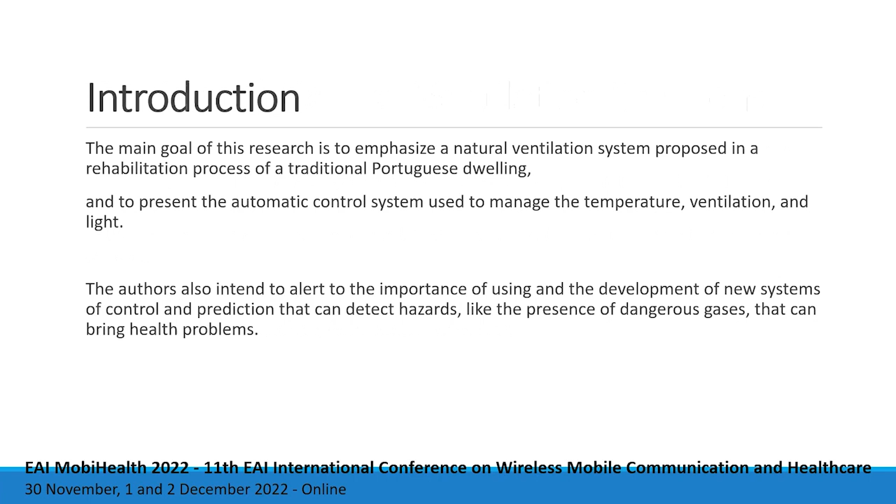In terms of ventilation, it can be natural or forced. Natural can be considered more sustainable. In contrast, a forced ventilation system may be more high-tech, requiring mechanical devices and energy consumption. But forced ventilation may be the only solution considering the specificities of the traditional buildings. For instance, the existence of underground floors, the lack of windows or doors, the density of the construction, the morphology of the landscape, and the insulation can contribute to the requirements of a ventilation system.

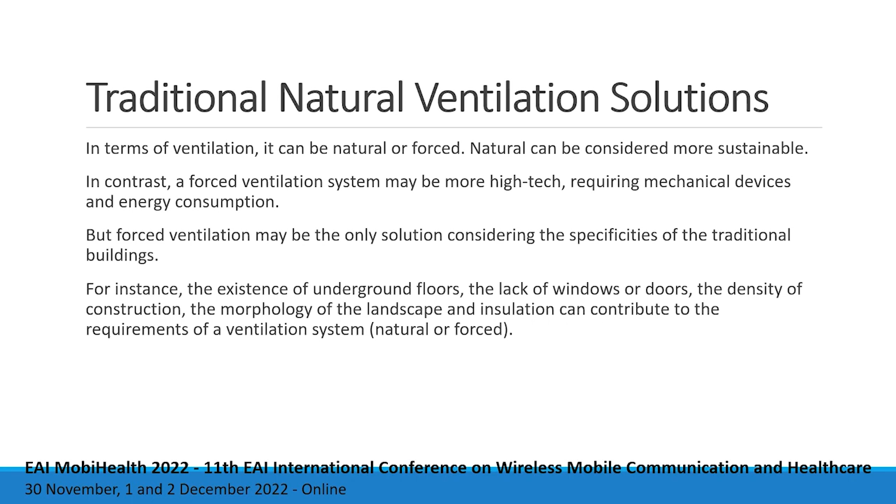A proper ventilation system allows good air quality in a building and contributes to the accommodation comfort. It avoids inconvenient smells and health-related problems such as allergies and breathing difficulties. At the same time, a proper ventilation system may avoid incidental scenarios, such as the high carbon monoxide levels that can cause death. Systems like control and prediction are needed to detect other hazards like radon or gases that can be dangerous to health. The comfort level of the accommodation is also a concern, and having some control over temperature, humidity, smell, and noise can also help.

Among traditional Portuguese dwellings, several building technical aspects guarantee natural ventilation. For instance, conventional timber frame windows and doors usually have poor insulation. The typical kitchen chimneys allow air circulation from inner and exterior spaces. Fireplaces may achieve the same feature. Meanwhile, the typical timber pavements and roofs are poorly isolated, allowing natural ventilation through different rooms. Thus, traditional dwelling may guarantee natural ventilation, even if inefficient.

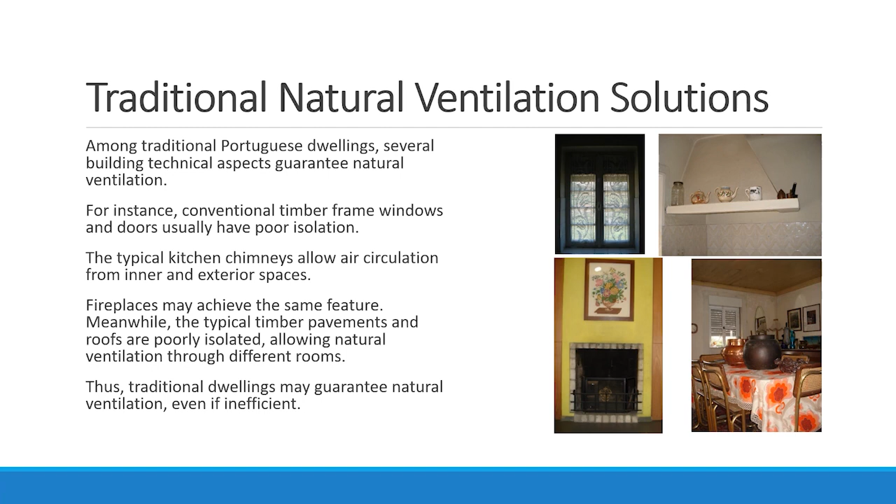On the other hand, new construction may behave differently, considering that they are much more isolated. Pavements tend to be reinforced and made of concrete. Windows and doors are sealed, and walls and roofs are insulated. Therefore, there is a need to build a proper ventilation system using pipe networks and grills. Level differentiation of entrance and exit of air is recommended. Bathrooms, closets, and storerooms may require this type of system because they tend to be unprovided of windows. When this type of natural ventilation is insufficient, it may be reinforced by forced ventilation, which relies on a mechanic extractor.

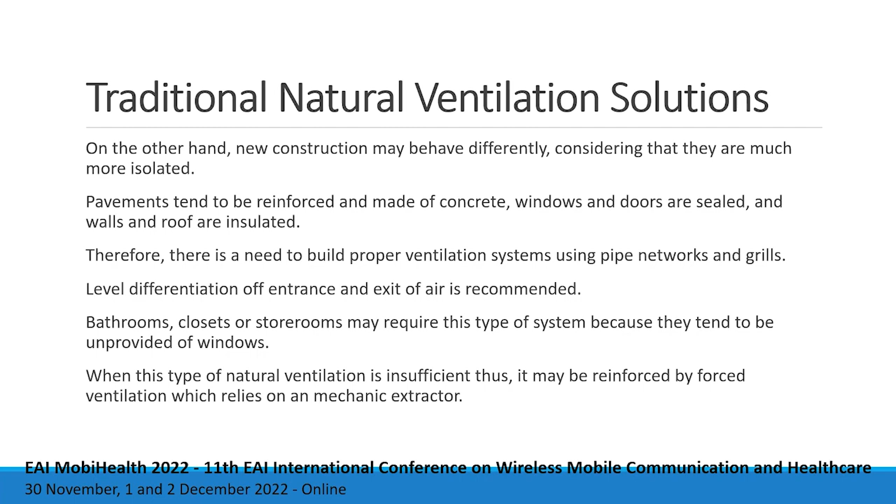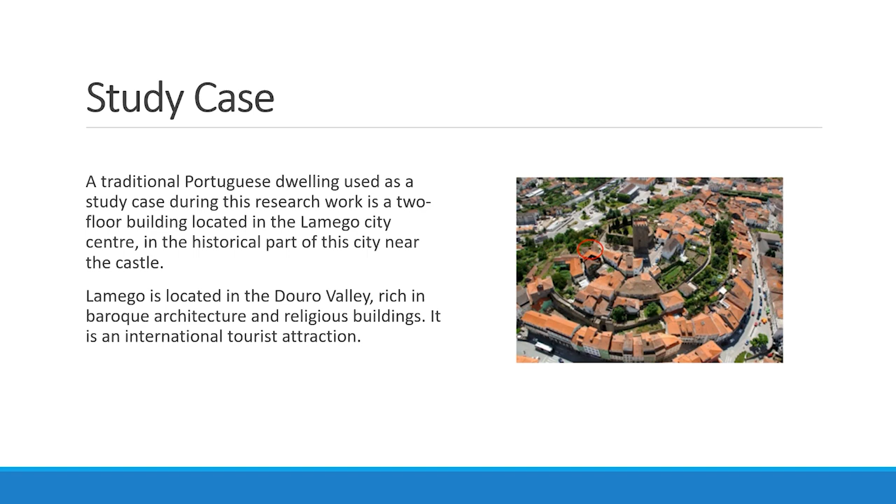For the study case, a traditional Portuguese dwelling was used. The dwelling is a two-floor building located in Lamego city center, in the historical part of this city near the castle. Lamego is located in the Douro Valley, rich in Baroque architecture and religious buildings. It is an international tourism attraction.

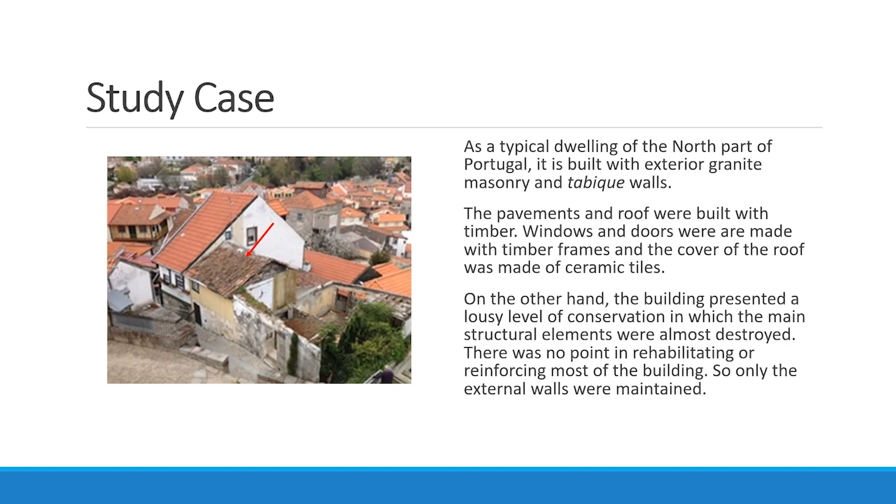As a typical dwelling of the north part of Portugal, it is built with exterior granite masonry and tabique walls. The pavements and roof were built with timber. Windows and doors were made with timber frames, and the cover of the roof was made of ceramic tiles. On the other hand, the building presented a lousy level of conservation, in which the main structural elements were almost destroyed. There was no point in rehabilitating or reinforcing most of the building, so only the external walls were maintained. Municipality regulations only allow the use of timber or steel as structural building materials for this type of rehabilitation process in this area. Therefore, steel frames, glulam pavements, and roofs were used.

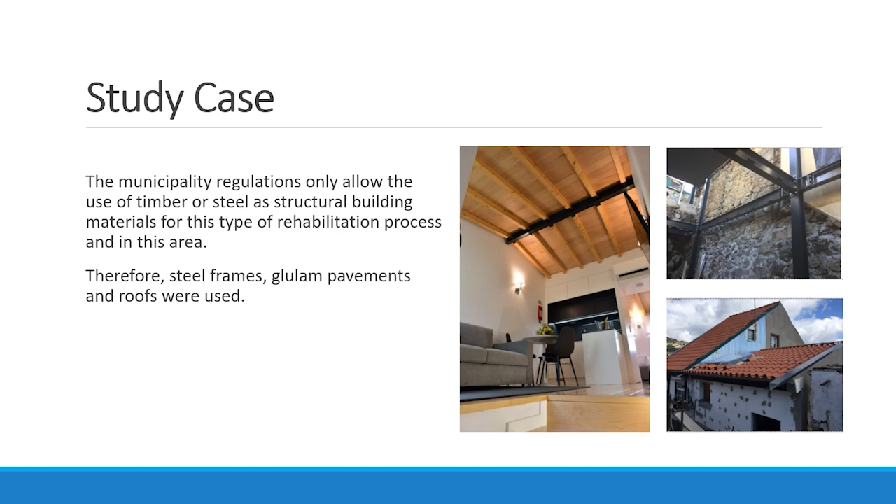This building was rehabilitated to be converted into a three-floor flat tourism accommodation. This specific building is lacking in terms of space. It is placed between two other traditional buildings and shares the same lateral walls. Therefore, only two exterior walls are allowed to have windows. Thus, natural light and natural ventilation can be potentiated by these two walls and through the roof, where it is possible to place windows and grills.

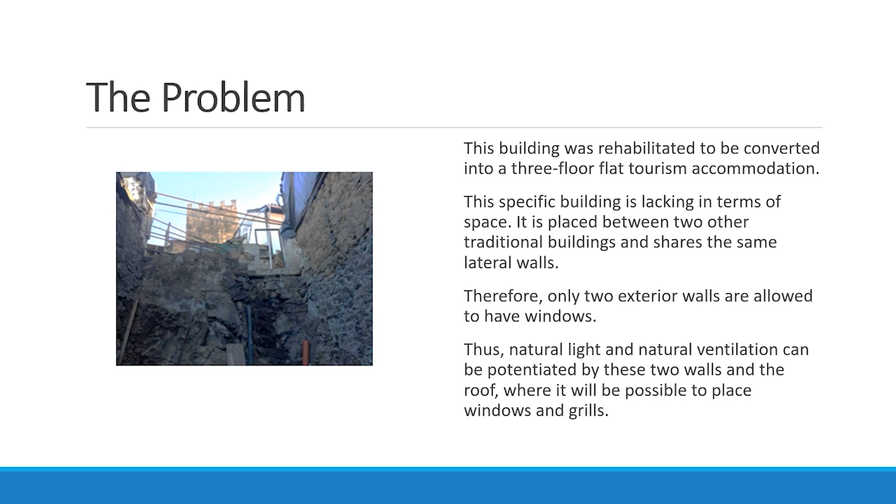At the same time, approximately one and a half floors of the building is under the road level. These building aspects created several difficulties concerning the air ventilation of the house and lighting. Musty smell, humidity, stagnant air, and dark spaces resulted from these building constraints, resulting in an unhealthy living dwelling. Thus, the original building could not meet the actual requirements of living comfort with quality.

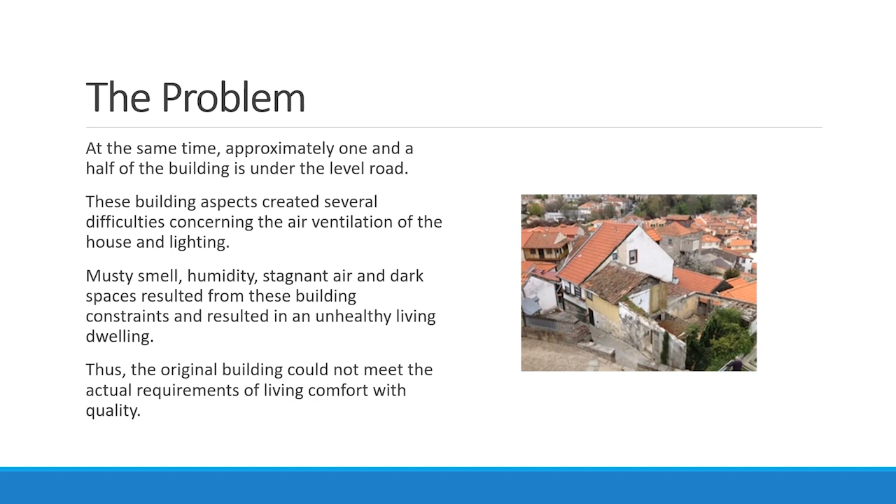Based on the above explanation, some building challenges existed during this rehabilitation process. One of the building solutions proposed to solve the above identified problems consisted of having an atrium on the left side of the building and next to the facade facing south. This atrium connects all the floors from the basement to the first floor.

The roof of the atrium is made of double glass to allow natural light entrance. This roof has surrounding grills in connection with the structure of the atrium. This structure ensures air circulation from the inside to the exterior and vice versa. At each floor level, each flat has a door and a balcony connecting to the atrium. On these floors, the atrium has windows placed in the main facade of the building.

It is relevant to add that each balcony is built with a steel grid pavement to allow air circulation and natural light passage between floors. At the basement pavement, a 200 millimeter diameter pipe network of PVC was considered to allow the air circulation between the interior of the atrium and the north face facade at this level. There is approximately a 9-meter height path to take into account.

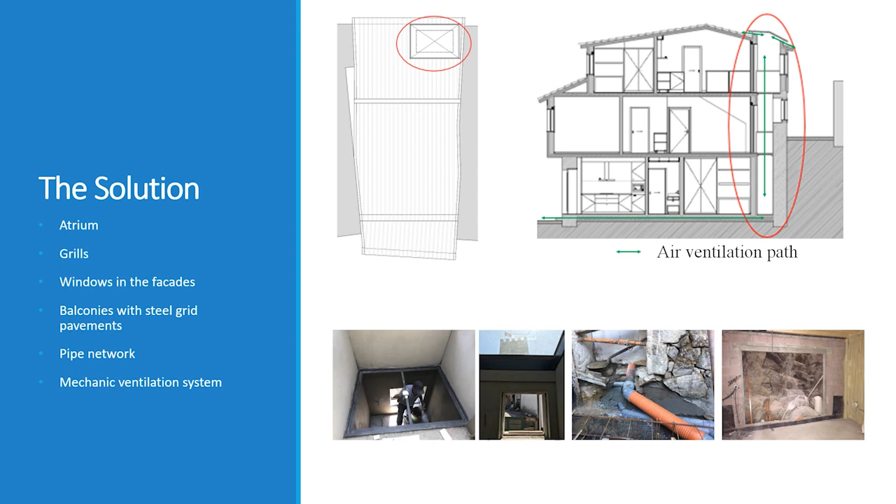In this rehabilitation process, other technical aspects were also a concern, which required additional care. It is not an intelligent house, but it used technology to reduce energy costs, increase comfort, and facilitate management like tourism accommodation. To have a more efficient energy rehabilitated building, the air conditioning system of each flat is remote controlled. It is possible to switch on or off the air conditioning devices using an online platform. It is also possible to know the temperature of each flat remotely.

The light system is also remote controlled as well as the ventilation. In this way, it is possible without going to the place to turn on the air conditioning before guests arrive to have a cozy atmosphere. It is also possible to turn off all or part of the electrical system, namely the sanitary hot water heating system when the guests leave the apartment. In addition, the blackout curtains are also remote controlled. With this technical solution, it was possible to obtain a more technological rehabilitated building and take a step toward an innovative construction and an intelligent building approach.